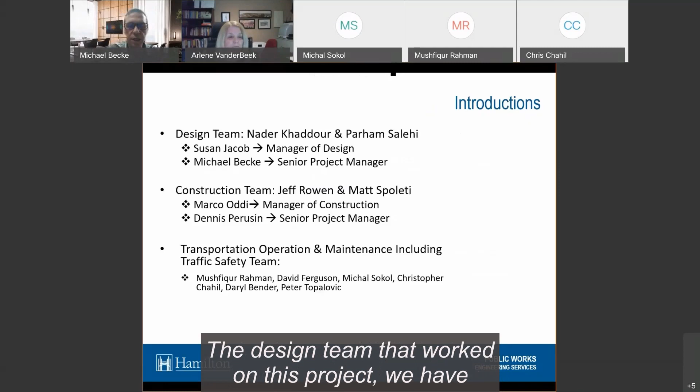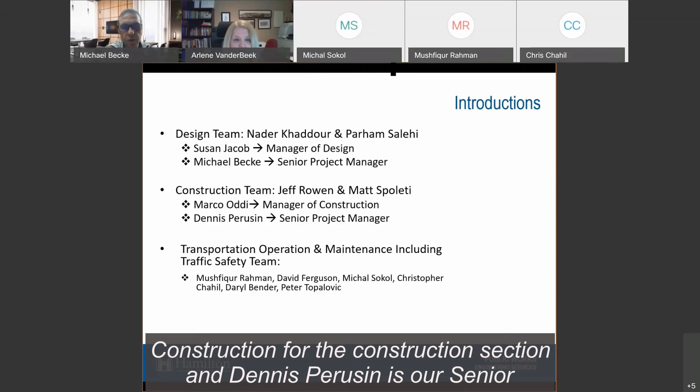So introductions. We'd like to introduce the design team that worked on this project: Nader Khaddour and Parham Salehi. They are the design team that did the design along with our consultants, Wood. Susan Jacob is the manager of design, who's also here, and myself, I'm Mike Becke, the senior project manager of the design section. We also have from our construction section, Jeff Rowen and Matt Spoleti. Jeff is the construction project manager, and Matt Spoleti will be our inspector on site. Marco Oddi is the manager of construction for the construction section, and Dennis Perusin is our senior project manager. We also have in attendance staff from the Transportation Operations and Maintenance Group, as well as Traffic Safety — Mushfiqur Rahman, Dave Ferguson, Michal Sokol, Christopher Chahil, Daryl Bender, and Peter Topalovic.

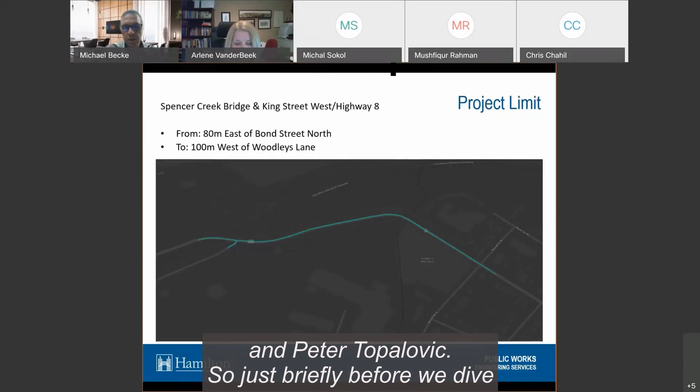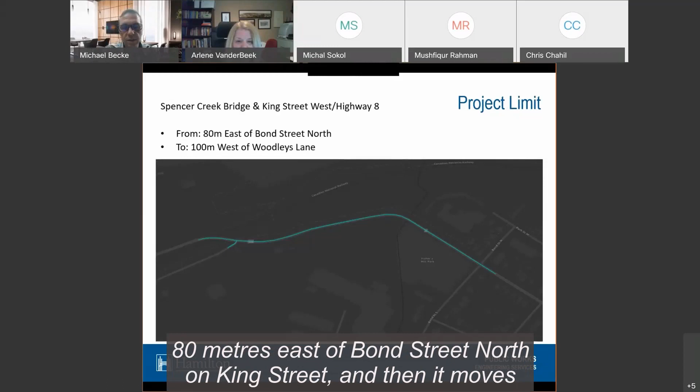Just briefly before we dive into the project, I want to go over the project limits. The project, as you can see on the screen, starts from about 80 meters east of Bond Street North on King Street, and then it moves up the hill to about 100 meters west of Woodleys Lane. That green line presented there shows the actual limits of the construction we'll be working in. There's a little bit of work on Woodley's Lane as well, that's the little tick you can see to the left of the screen.

So we'll move in. I'd like to introduce Nader Khaddour, who is the project manager for this project, and he'll give you some explanations and a brief history on the project.

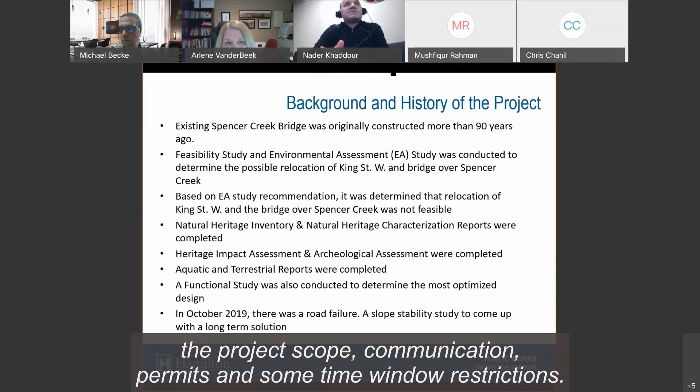So background and history of this project. The major component of this project scope of work is Spencer Creek bridge replacement. This bridge was constructed back in 1926 and is right now over 90 years old. The bridge underwent rehabilitation work in 2004 for different components. In 2009, a bridge condition survey and load evaluation assessment were completed, which found several major deficiencies.

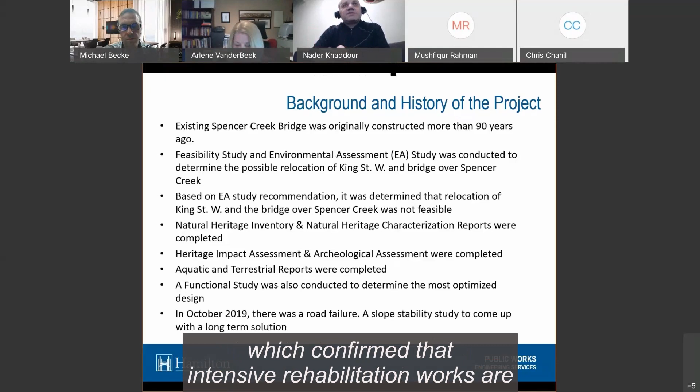A biannual monitoring program has been underway since 2012, and different studies were completed in order to figure out the condition of this bridge, which confirmed that intensive rehabilitation works are required in order to maintain this bridge operational.

Based on the bridge condition, City of Hamilton considered replacing this bridge alongside the potential realignment of Highway 8. For that, a feasibility study was conducted, and the outcome of the feasibility study was brought forward as part of an environmental assessment study, which was conducted to determine the possible relocation of Highway 8 and the best approach in order to replace this bridge.

As part of this study, 4 options were considered. First, do nothing. Second, rehabilitation work, which is very costly. Third, replace the bridge in its location with some improvement to the alignment. And the fourth is replacement of the bridge alongside the realignment of Highway 8.

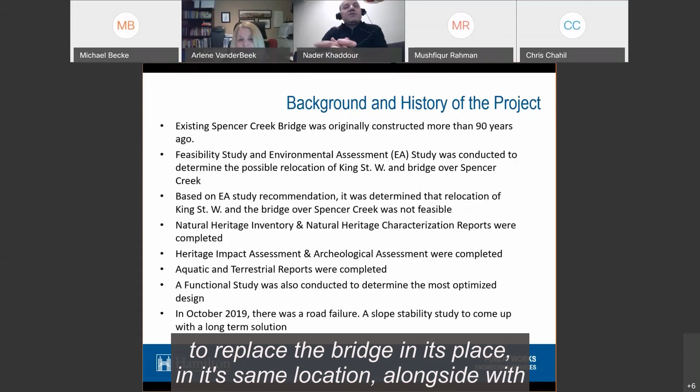Those 4 options were examined against different criteria and scored. Based on the overall evaluation of these 4 options and the scoring each option got, the final recommendation from the study was to replace the bridge in its same location, alongside some improvement to the alignment.

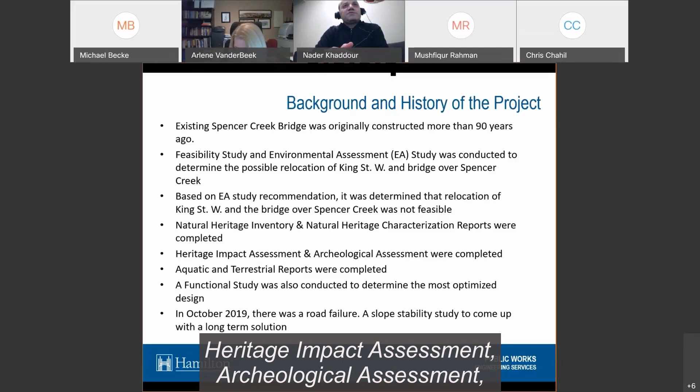As part of City of Hamilton's process for such a project, multiple studies were conducted, such as a natural heritage inventory, natural heritage characterization report, heritage impact assessment, archaeological assessment, and aquatic and terrestrial report.

Based on the recommendation from the EA study, we started work on a functional study in order to consider different alternatives for road improvement and what we can add to the proposed scope of work to improve the condition for pedestrians and for mobility and traffic on that highway.

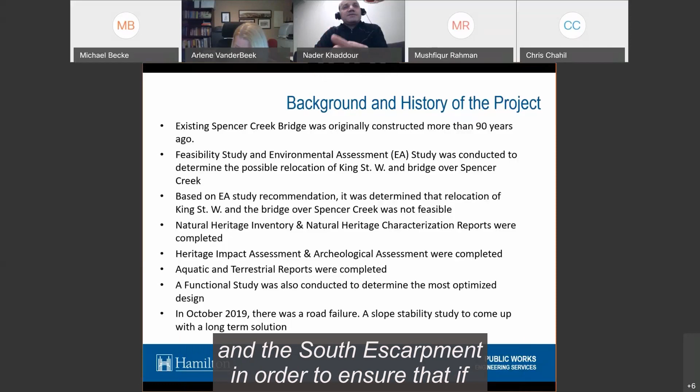While we were moving from the functional study to the detailed design, in October 2019, a road failure occurred. Due to this failure, the City decided to conduct a slope stability study for the North Escarpment and South Escarpment in order to ensure that improvement is completed if required.

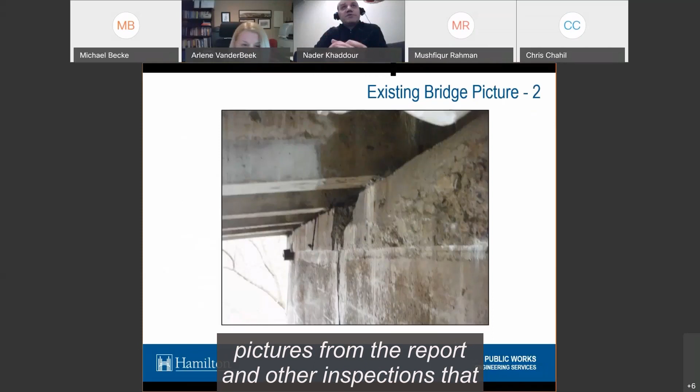This picture shows the deterioration on the southeast section of the bridge. Here it shows the deterioration on the abutment and the cracks there. We have more pictures from the monitoring report and other inspections that were completed, but we selected those pictures to show the condition of this old bridge.

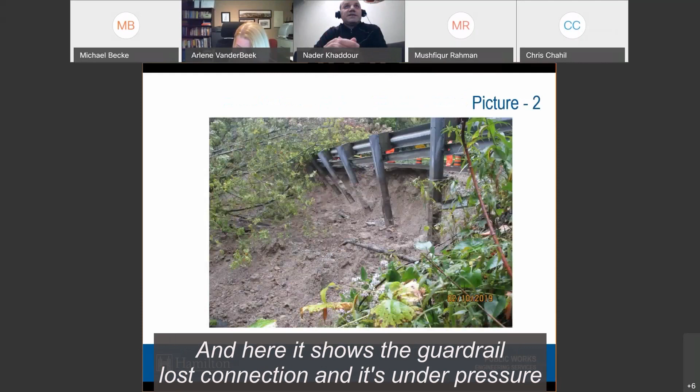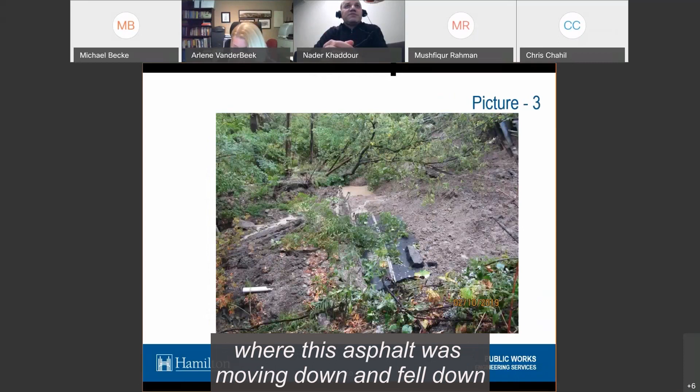Here is the failure that happened back in October 2019, showing that a massive section of this road fell down. Here it shows the guardrail lost connection, and it's under pressure from this massive asphalt piece. And here it shows where this asphalt was moving down and fell down on the escarpment, causing a washout of the trees.

Reports and investigation. As part of our detailed design, we usually do different reports and investigations in order to get more information to optimize our design. For that, the following reports were conducted.

Geotechnical investigation report: in order to get more information about soil condition, whether it's soft or hard, whether there's rock or shale, and also the moisture content. This information helped us in selecting the most appropriate pavement structure.

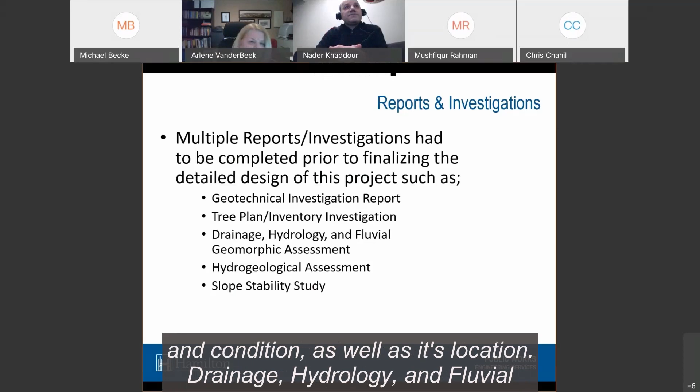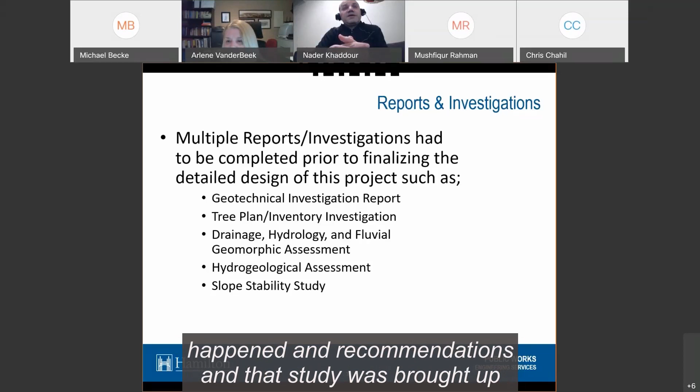Tree plan inventory investigation helped identify tree type, dimension, condition, and location. A drainage, hydrology, and fluvial geomorphic assessment was completed as well, and a hydrogeological assessment to get information about groundwater and its flow. Finally, a slope stability study was completed due to the failure that happened, and the recommendation from that study was brought up as part of the scope of work.

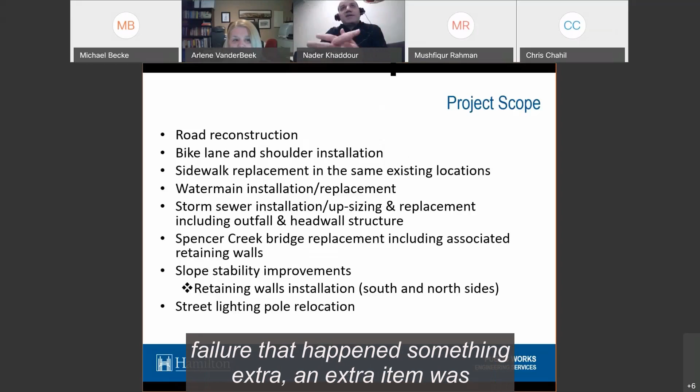Project scope of work. As I mentioned, the major component of this scope of work was the bridge replacement, and due to the failure that happened, an extra item was added to the scope of work, as well as based on the city's ongoing inspection and assessment of its assets within the project limit. The final scope of work is as follows.

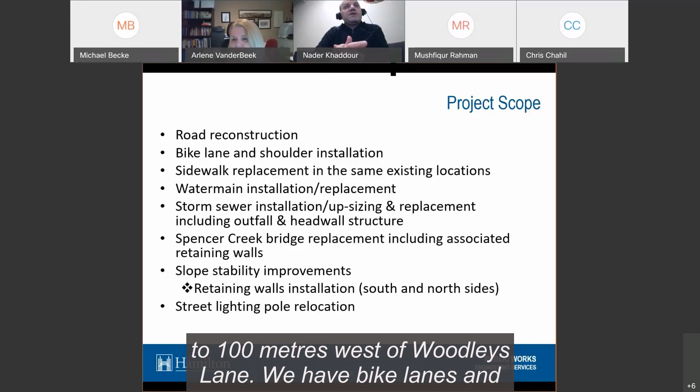We have road reconstruction from Bond Street north to 100 meters west of Woodleys Lane. We have bike lane and shoulder installation. We have sidewalk replacement in the same exact existing location. We have water main installation and replacement from Bond Street to the node on Woodleys Lane.

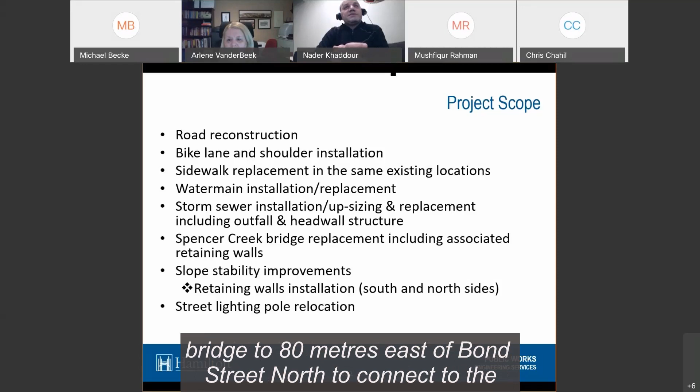And we have one section, a connection from Highway 8 grade to the bottom of the slope where we're connecting to the existing chamber. This one uses the trenchless method. Also, we have storm sewer installation from east of the bridge to 80 meters east of Bond Street north to connect to the existing storm network.

As well as we have an upsizing and replacement for the existing storm sewer from 100 meters west of Woodleys Lane to west of the bridge. And for reinstalling as well an oil grit separator in order to control the water quality before it's discharged through the outfall.

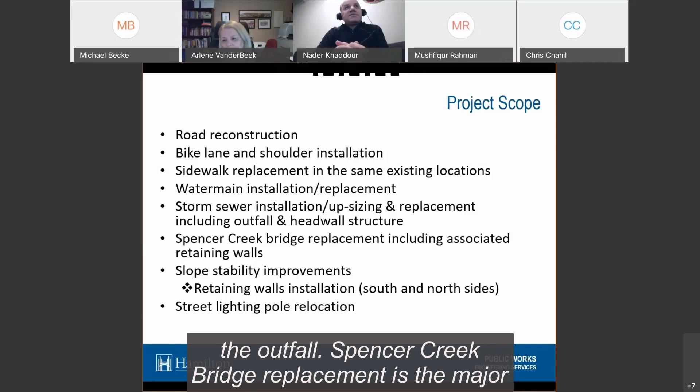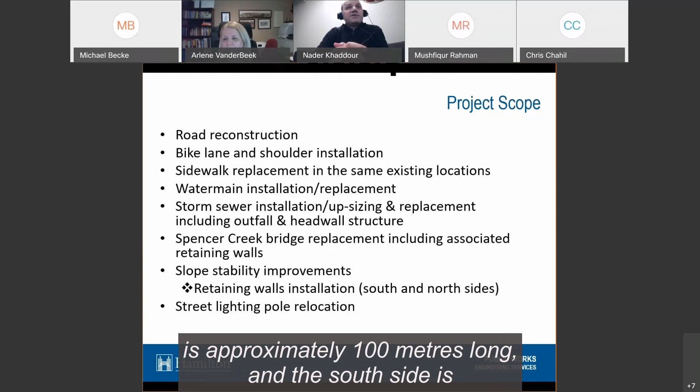Spencer Creek bridge replacement is the major component, including the associated retaining wall on the southwest side. Also, slope stability improvement due to the study. We have a recommendation to, in order to improve stability on both sides, north and south, install two sections of retaining walls. One on the north side, approximately 100 meters long, and the south side approximately 85 meters long. And also, a couple of street lighting poles need to be relocated as they are in conflict with our proposed design.

Here, this picture shows the features that we have. At the intersection of Bond Street and King Street West, we have the four corner AODA.

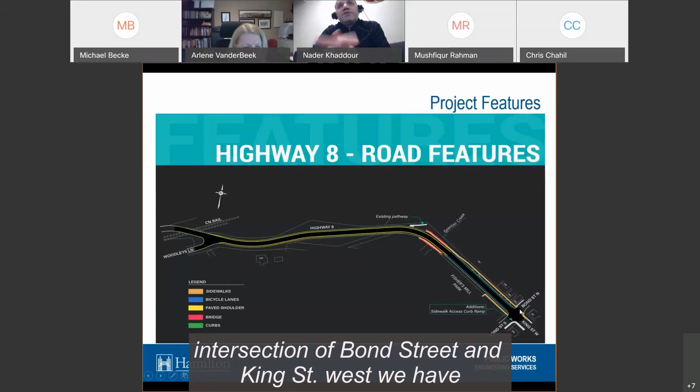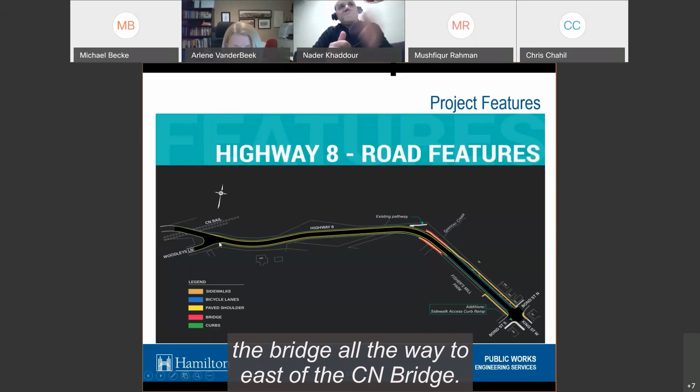The sidewalk is shown in orange color, which is on the south side; it ends where the soccer field is, and on the north side it's extended up to the bridge. Bicycle lane is designated from Bond Street north to east of the bridge, and then we have a shoulder from the bridge all the way to east of CN Bridge. We have the bridge itself, and we have curb on both sides for the whole stretch except on the bridge location.

Communication with internal and external stakeholders. We know the impact of this project and its scope of work on the community. So for that, we started a communication process with them in order to inform them about the project scope of work and the road closure as well. And for that, we contacted Hamilton Emergency Medical Services, Hamilton Police Services, and Hamilton Fire Department.

That was back in December 2020 to inform them about the project and the road closure. And we contacted them again in early January 2021 to provide them with the approved detour route. We also contacted school boards in March in order to inform them about the project and the road closure, and we provided them with the detour route. And I also sent a follow-up email to all of them to inform them about the exact start date of the construction.

As part of our communication, we also contacted Bruce Trail and met with them back in 2019 to inform them about the project and the road closure, and they agreed to close the trail during construction. Right now they're looking for a different route to reroute the Bruce Trail if possible, and they're in discussion with different stakeholders.

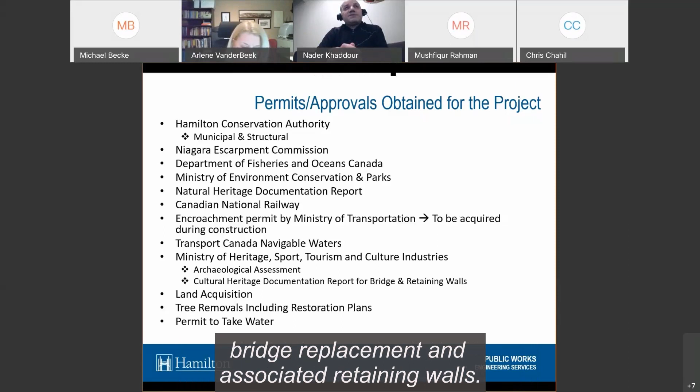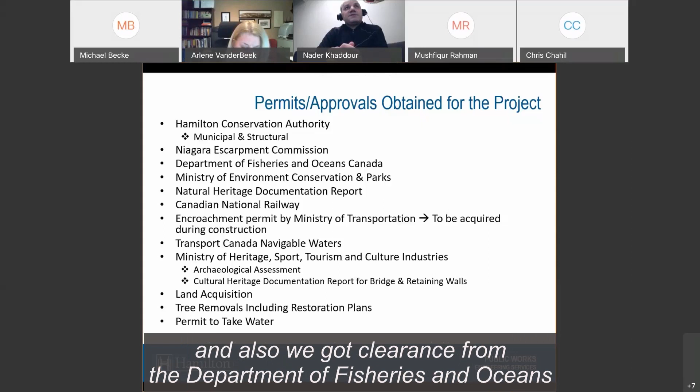We got a permit from Hamilton Conservation Authority regarding the outfall and the head wall structure, and another second permit for the bridge replacement and associated retaining wall. We got clearance from the Niagara Escarpment Commission, and also clearance from the Department of Fisheries and Oceans Canada. We got a permit from the Ministry of Environment, Conservation and Parks for storm sewer installation.

This was obtained previously: Natural Heritage Documentation Report clearance for it, and we got a permit from Canadian National Railway to allow us to install the storm sewer underneath the bridge.

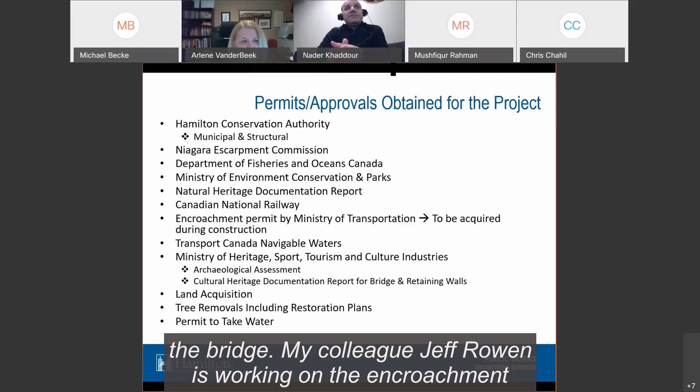My colleague Jeff Rowen is working on the encroachment permit by Ministry of Transportation. We got clearance from Transport Canada Navigable Waters, and also clearance from Ministry of Heritage, Sport, Tourism and Culture Industries, one related to the archaeological assessment and the other related to the cultural heritage documentation report for the bridge and retaining walls.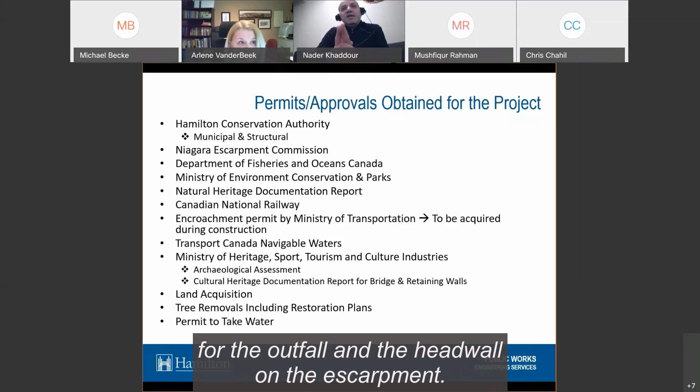Land acquisition was required for the new proposed retaining walls, one on the north and one on the south side, as well as for the outfall and the head wall on the escarpment, and there's a small portion on the southwest corner of the bridge.

Tree removal, including a restoration plan, was also approved by Hamilton Conservation Authority and the City of Hamilton Forestry and Horticulture section. The only outstanding permit we don't have yet is the permit to take water.

We are in the final stage, just due to COVID-19 the approval process is longer than usual right now, but we're in the final stage. We expect to have it before starting any dewatering work.

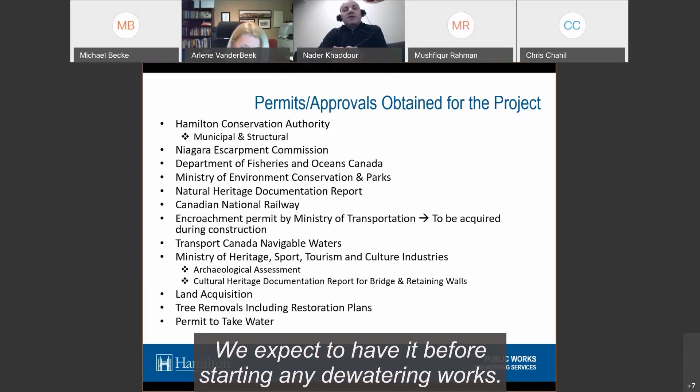Regarding construction time restrictions, we have two construction timing windows: one regarding in-water work and one regarding tree removal. No in-water work shall be completed between March 15 and July 15, and no tree removal shall be completed during the seasonal window from April 1st to September 30th.

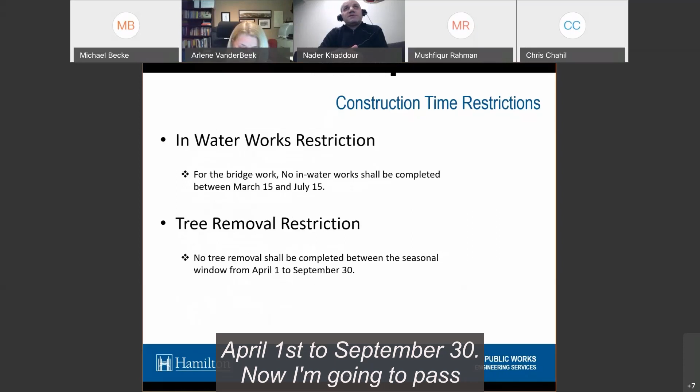Now I'm going to pass over to my colleague Parham so he can go over some engineering drawings and provide some details. Thank you, Nader.

As you can see, this slide shows the existing conditions of King Street West, Highway 8, from Spencer Creek looking easterly towards Bond Street. There are two traffic lanes as existing conditions, a sidewalk on the north side, and a sidewalk on the south side which comes from the intersection and goes into Fisher's Mill Park.

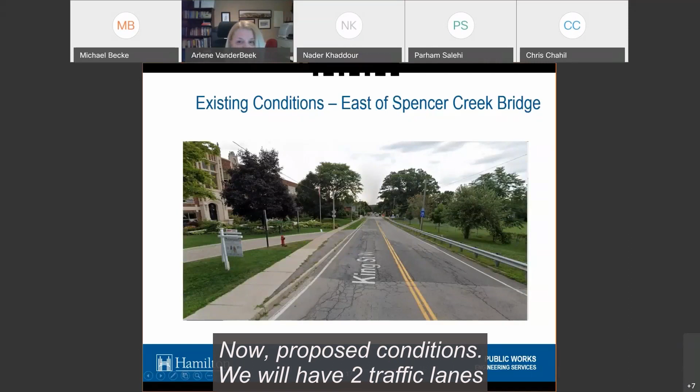In the proposed conditions, we will have 2 traffic lanes and designated bike lanes from Bond Street up to the Spencer Creek Bridge. The sidewalk will be replaced in its exact location on the north side, same on the south side, again leading to Fisher's Mill Park. We will have curb and gutter throughout the project.

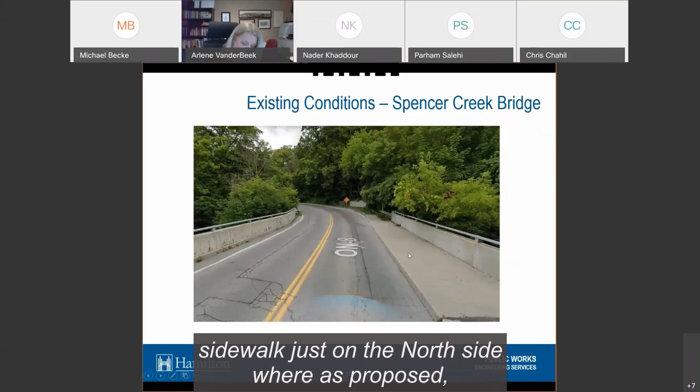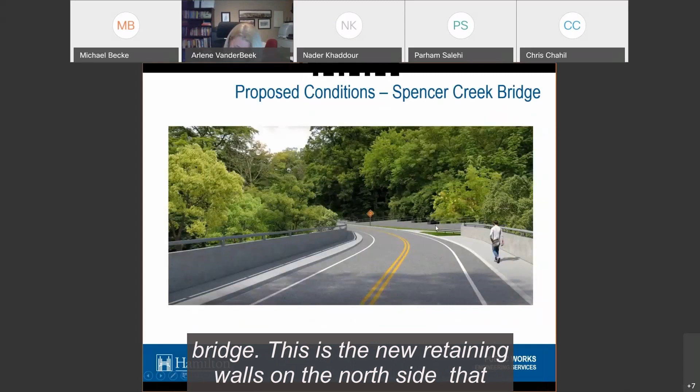This slide shows the existing condition on top of the Spencer Creek Bridge: again, 2 traffic lanes, with a sidewalk just on the north side. In the proposed design, we will have 2 traffic lanes, 2 paved shoulders, and 2 sidewalks on both the south and north sides of the bridge. This is the new retaining wall on the north side, required due to the slope stability study.

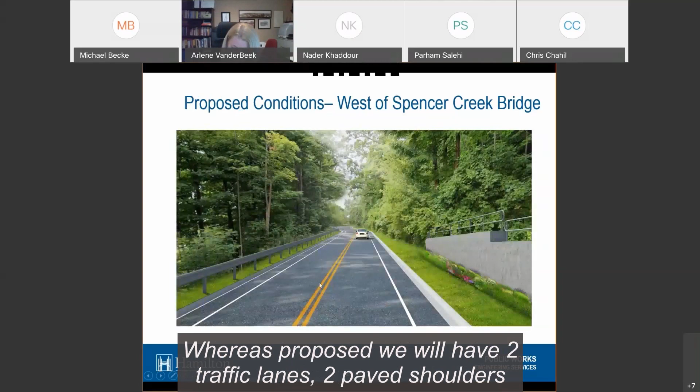This is from Spencer Creek Bridge, looking westerly towards Woodley's Lane. In existing conditions, we have 2 traffic lanes and a shoulder on the north side. In the proposed design, we will have 2 traffic lanes, 2 paved shoulders, and curb and gutter throughout the whole project.

This is the retaining wall on the north side. We will also have a retaining wall on the south side, but because of the trees you won't be able to see it. However, it is in the drawings and it will be constructed.

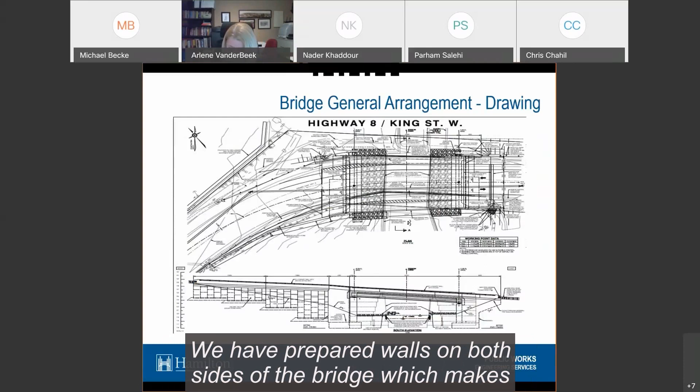This is our bridge general arrangement drawing. The proposed bridge will have a span of 23 meters. The cross section on the bridge will be 14.4 meters: 2 traffic lanes at 3.6 meters each, 2 shoulders at 1.5 meters, and 2 sidewalks at 2.1 meters each. We have parapet walls on both sides of the bridge, making the total cross section 15 meters. There are associated retaining walls on the southwest corner, shown right here as well.

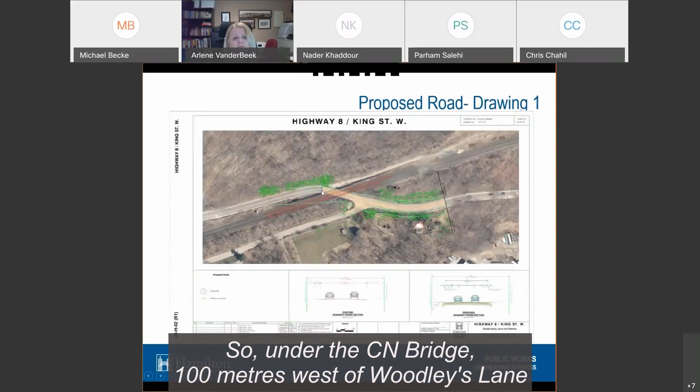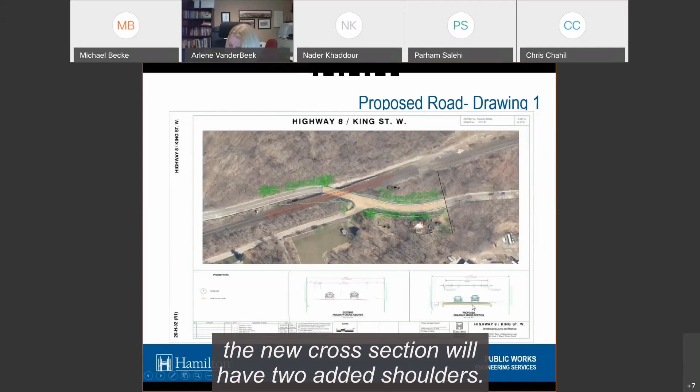This is our design drawing regarding just the road. This is the CN bridge, and this area is Woodley's Lane. Under the CN bridge, so 100 meters west of Woodley's Lane up to Woodley's Lane, the cross section of the road will remain as existing. We are not widening the road or changing elevations, as we needed to obtain the permit from CN. However, from Woodley's Lane moving easterly, as mentioned, the new cross section will have 2 added shoulders, so we'll have 2 traffic lanes and 2 shoulders, with curb and gutter on both sides.

The next slide is the same slide; it just shows the underground works. This is the storm sewer, identified in green, that goes under the CN bridge and continues west of the Spencer Creek Bridge. This is the water main that connects to the node on Woodley's Lane.

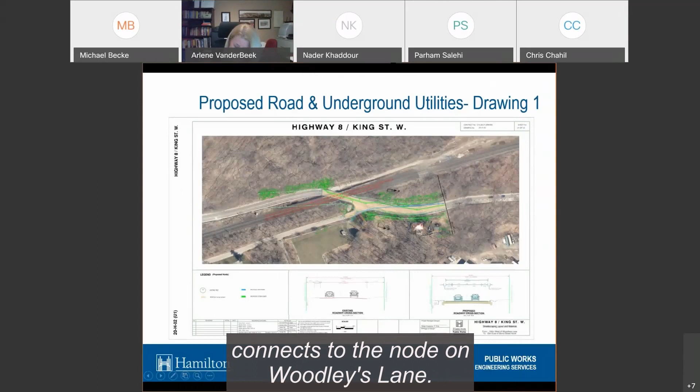This is the continuation of the previous slide, showing roadworks without any underground. The road cross section remains the same: 2 traffic lanes of 3.5 meters, 2 shoulders of 1.5 meters each direction, curb and gutter. At the bridge location, there will be sidewalks, 2.1 meters on each side.

The next slide shows underground work as well. The blue line is the water main works, which will be suspended under the proposed bridge. The green line indicates the storm sewer and the outfall and headwall structure, which is the new proposed outfall and headwall structure discharging to Spencer Creek. The water main through the escarpment will be installed trenchless, with a valve chamber at the bottom of the escarpment connecting to the proposed water main and onto the Highway 8 road grade.

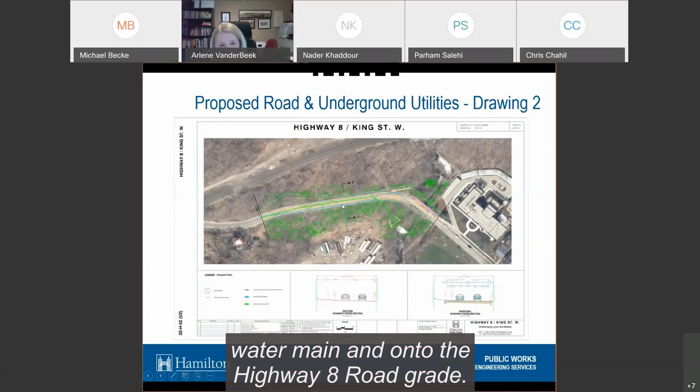This slide is the continuation of the previous one. Again, this is just road, 2 traffic lanes, 1 each direction at 3.5 meters. We now have bike lanes dedicated from Bond Street up to Spencer Creek Bridge, which my colleague Daryl Bender will speak about in later slides. The pink indicates the sidewalk, in the exact locations as existing, but being reconstructed.

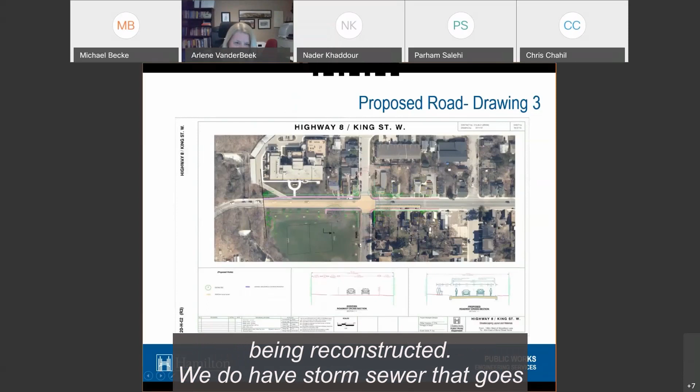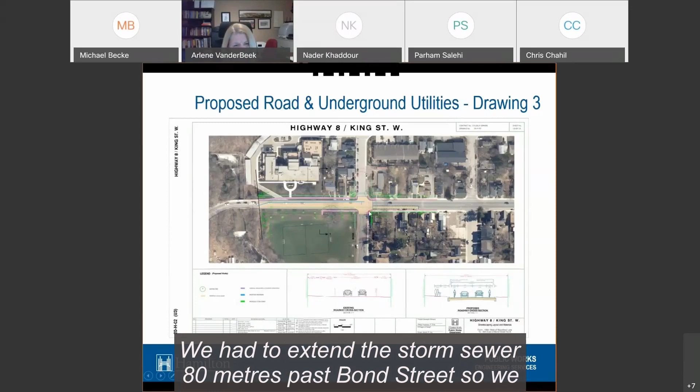We do have storm sewer that goes beyond the intersection. On this slide, the blue indicates the water main and the green indicates the storm sewer. We had to extend the storm sewer 80 meters past Bond Street to connect to the existing storm drainage system. Beyond that, it will just be road restoration.

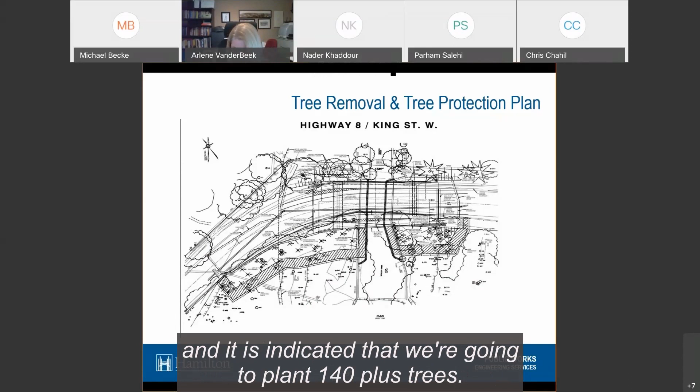There was a mistake where previously we said 60 trees were going to be replanted, because some of them were considered shrubs. However, our forestry department took another look, and it's now indicated that we're going to plant 140 plus trees. So we're going to have a 1-to-1 ratio, which was accepted by Hamilton Conservation Authority to obtain the permit.

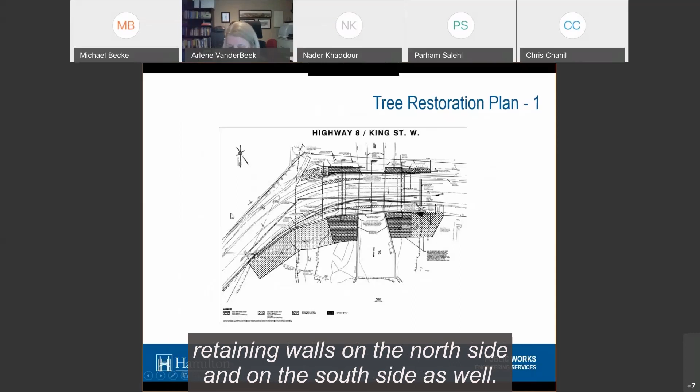This is just an example of the restoration plan where the trees will be planted, for the bridge. We're going to have one for retaining walls on the north side and on the south side as well. And this is an example of the trees that will be planted.

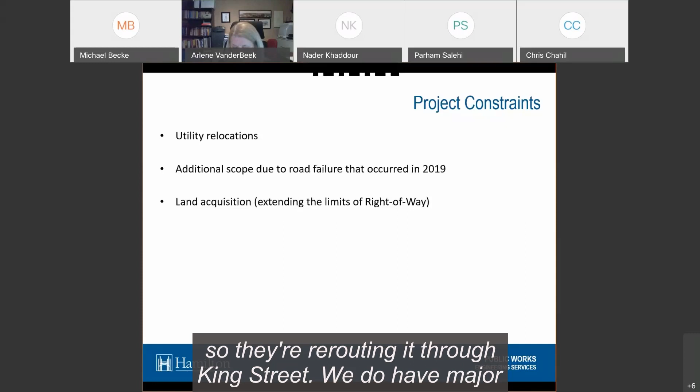We did have some project constraints, including utility relocations. We had a utility on the bridge that was suspended by the side of the existing bridge, and now it was decided that they're not going to go under our proposed bridge, so they're rerouting it through King Street. We also have major Bell cables on the north side of our bridge, so we decided to keep the north side of the proposed bridge the same as existing and shift it towards the south side.

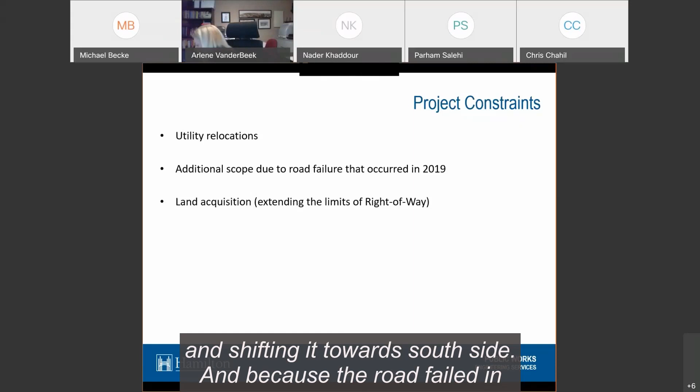Because the road failed in 2019, we had to do a slope stability study, which indicated we required retaining walls on both the south and north side. However, because of the major utilities, we had to propose a design for the new retaining wall on the north side to go behind our right of way, where we don't have conflicts with utilities, which cost us buying additional land on the north side and south side as well.

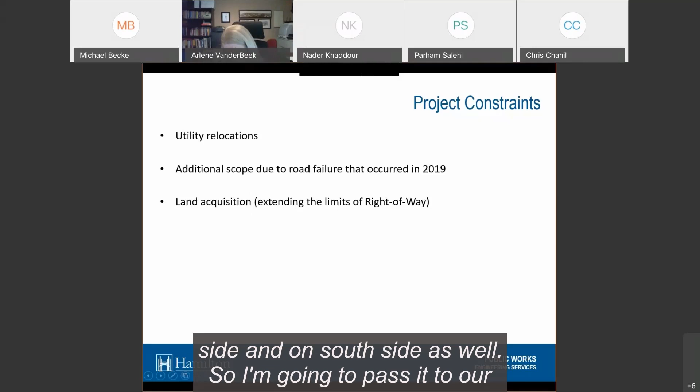So I'm going to pass it to our colleague, Jeff Rowan from construction. He is the project manager, and he will talk about the construction schedule and the construction regarding this project.

The construction schedule will start basically from April 12th until December 2022. We do have 2 stages. The first stage will be from 100 meters west of Woodleys Lane to Woodleys Lane, where we will do the storm sewer under the CN bridge. The second stage will be from Woodleys Lane up to Bond Street, where we have the bridge works, water main, storm sewer, and retaining walls. The road will be closed during the entire construction duration.

There was an avian biologist involved regarding the tree removals. We did have time restrictions as well, as my colleague Nader mentioned.

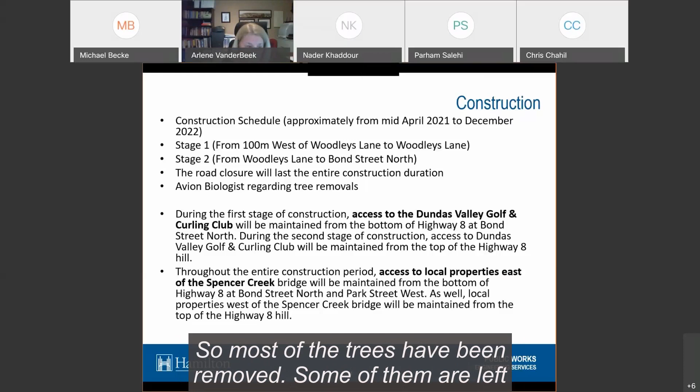Trees had to be removed before April 1st, so most of the trees have been removed. Some of them are left, which we have to come back for after September 30th when the restriction is lifted.

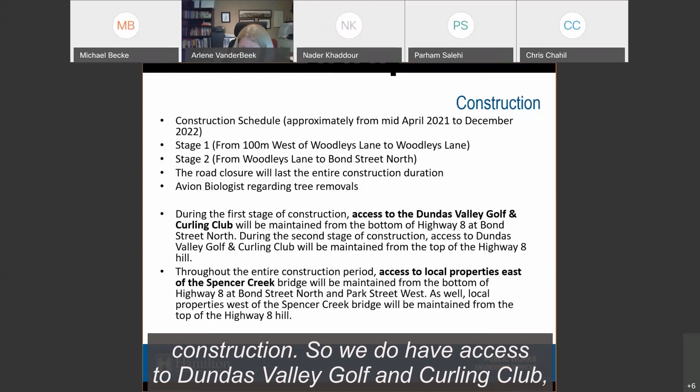During the first stage of construction, we have access to Dundas Valley Golf and Curling Club, which will be from the bottom of Highway 8 at Bond Street North. For the second stage of construction, access will be maintained from the top of Highway 8.

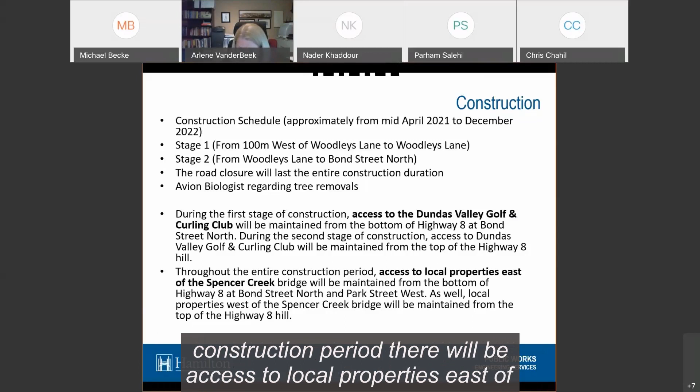Throughout the entire construction period, there will be access to local properties east of Spencer Creek Bridge, maintained from bottom of Highway 8, Bond Street North, and Park Street West. And local properties west of Spencer Creek Bridge will have access coming from the top of Highway 8 Hill.

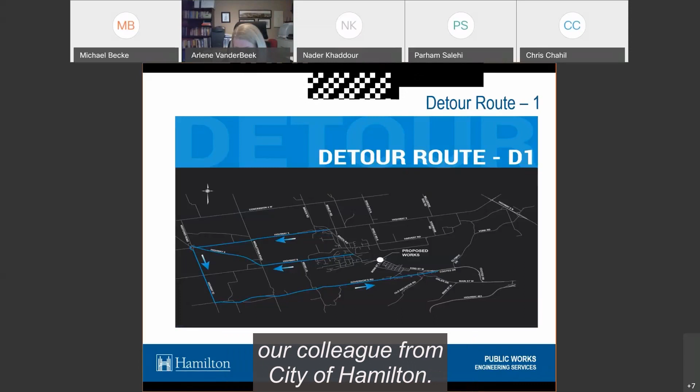So we have detour routes, which I can pass to Chris Chahil to talk about, our colleague from the City of Hamilton. Good evening, everybody. I guess Jeff was going to speak to this, but he's having some issues.

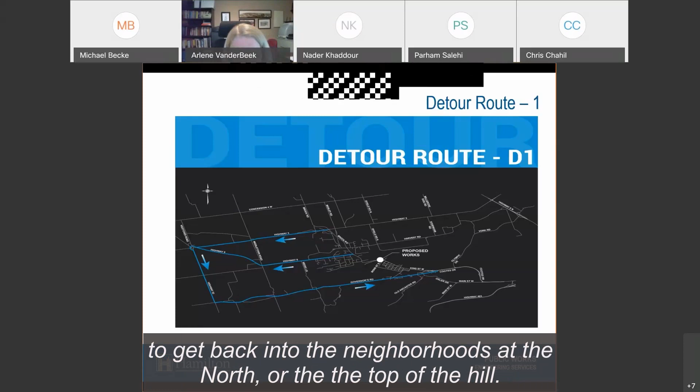There are 4 detour routes set up, generally traveling to the east. We're accessing York Road to Highway 6, then to Highway 5, and to Brock Road to get back into the neighborhoods at the north or top of the hill.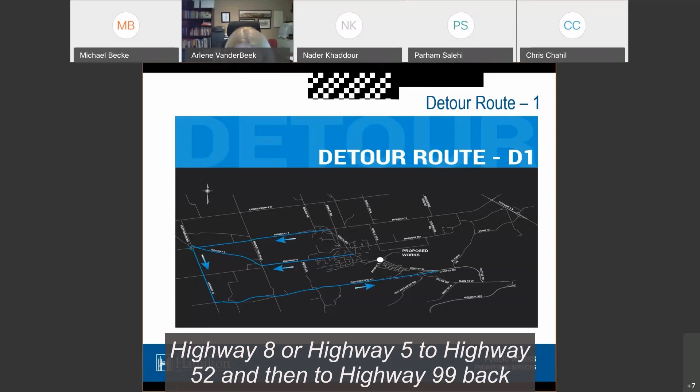Going from the west of the closure, you would travel on Highway 8 or Highway 5 to Highway 52, and then to Highway 99 back into Dundas, and the reverse if trying to get from Dundas into the Greensville area. This is the second detour route.

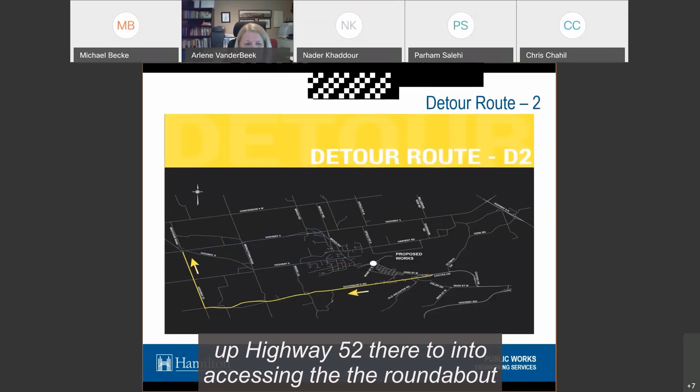Sorry, I was looking at the other map. This one's going to travel westbound on Highway 99, and then up Highway 52 there, accessing the roundabout at 5 and 52.

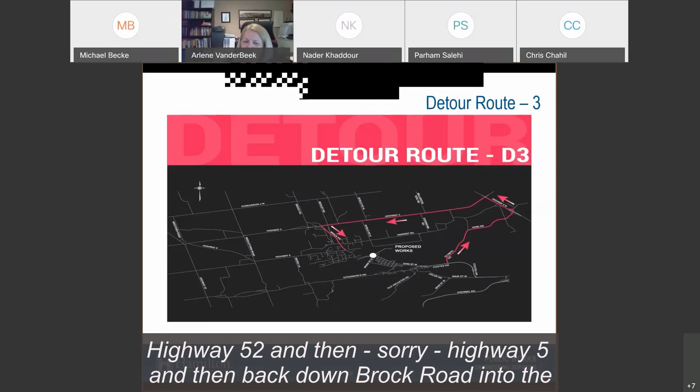Detour Route 3 will travel from east of the closure up York Road, then to Highway 6, Highway 5, and then back down Brock Road into the Greensville area.

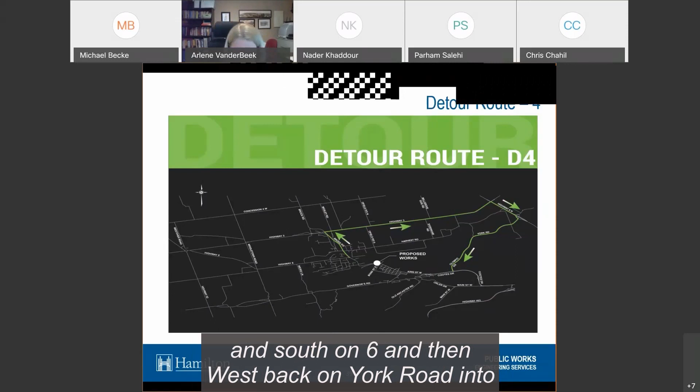Detour Route 4 is just the reverse, for trying to get back into the Dundas area west of the closure from Greensville: travel north on Brock Road, east on Highway 5, then south on 6, and then west back on York Road into the lower part of Dundas.

I'll pass this over to Daryl Bender to speak to the detour route for cycling. Good evening, everyone, Daryl Bender here.

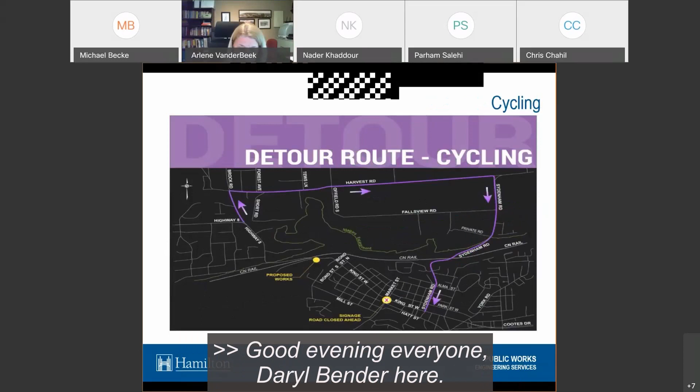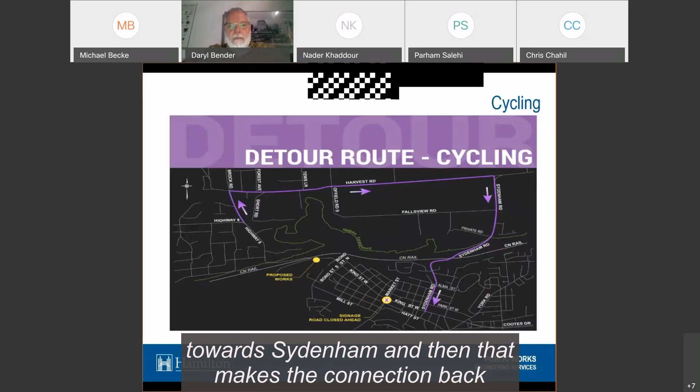The detour for cycling: there will be signage at the top of the hill in the Greensville area directing traffic to head north on Brock Road. For cyclists, we're telling them to follow the Greenbelt route, which is Harvest Road. That will take them easterly towards Sydenham, making the connection back down into Dundas.

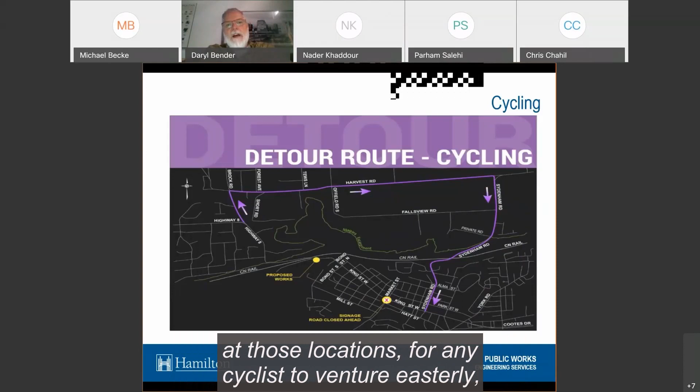In the opposite direction, for cyclists in the downtown area, we're putting up signage at the two intersections of King and Market and at Hatt and Market, which are existing signed bicycle routes. We're notifying any cyclists venturing easterly that King Street is closed at the escarpment.

The other comment we wanted to add regarding cycling: you've already seen the images Parham showed you as to what the finished product will look like. Those decisions were basically drawn from the city's cycling master plan.

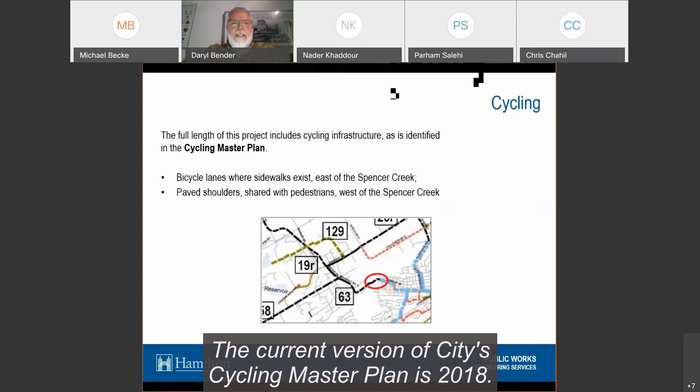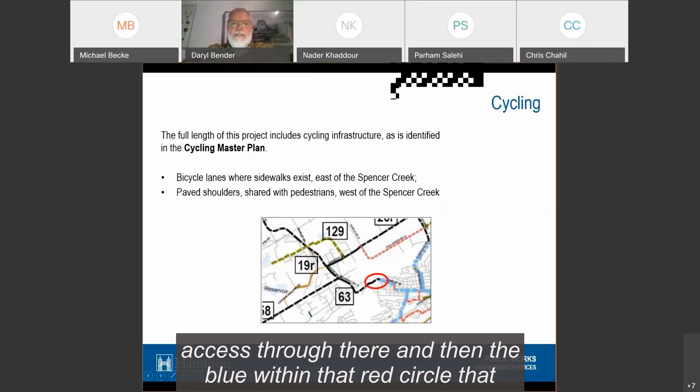The current version of the city's cycling master plan is from 2018. You can see in that red circle that the black line indicates the portion of the project that will be paved shoulders, shared with pedestrian access. The blue within that red circle represents the bicycle lanes, which will be dedicated for cycling use between the bridge and Bond Street, because there's a parallel sidewalk.

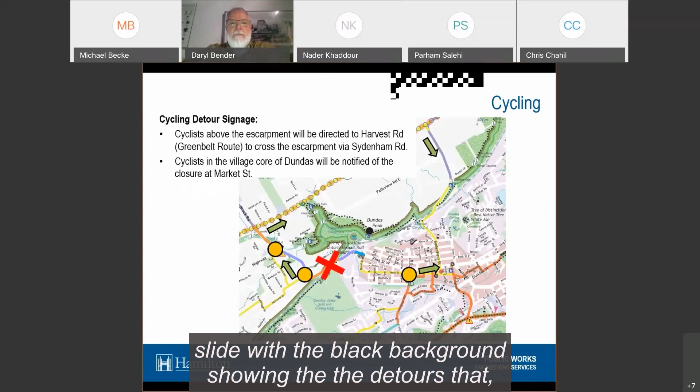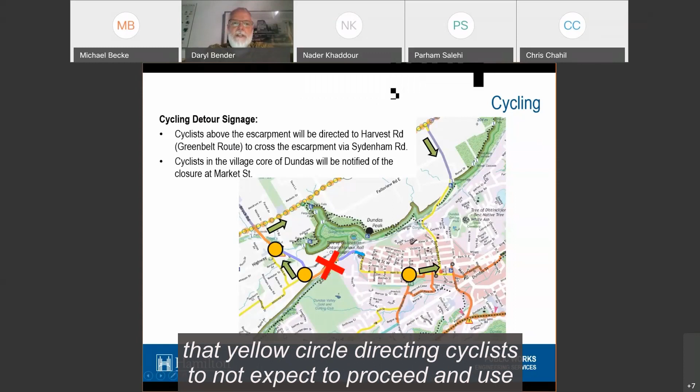This slide repeats what was shown previously regarding the detours: on Greensville above the escarpment, the routing directs onto the Greenbelt route on Harvest, and in the lower city, signage at the intersection of Hatt and Market, shown by the yellow circle, directs cyclists not to expect to use King Street and Highway 8 as access to the escarpment. Okay, thank you very much, everyone.